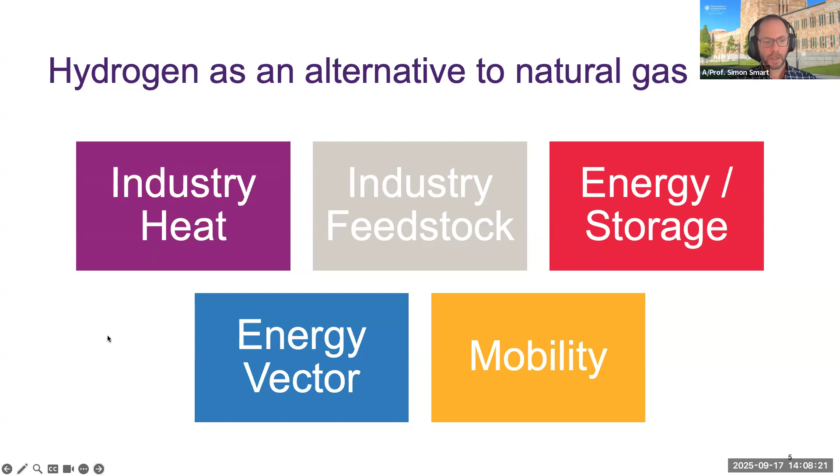In terms of the Australian hydrogen opportunity, this is one of the slides where I'm going to plug Net Zero Australia, our website. As Michael said, we've got an update to all of this next week. These are our phase 1 results. Essentially, when we look at the potential opportunity for hydrogen as an energy vector, as an export vector in Australia, we have tremendous opportunity.

In the study, we actually modeled both the domestic and the export system, and we said let's swap out all of our fossil energy exports for an equivalent energy amount of a hydrogen vector. So we're on the order of 140 to 150 million tons of hydrogen being exported by 2060, which is an extreme kind of scenario, but highlights what the world requires of Australia at the moment in terms of energy.

In terms of what that story looks like, in the majority of cases our modeling showed that initially blue hydrogen features, but as the cost of solar, electrolyzers and other renewable energy and storage comes down, green hydrogen largely wins that race.

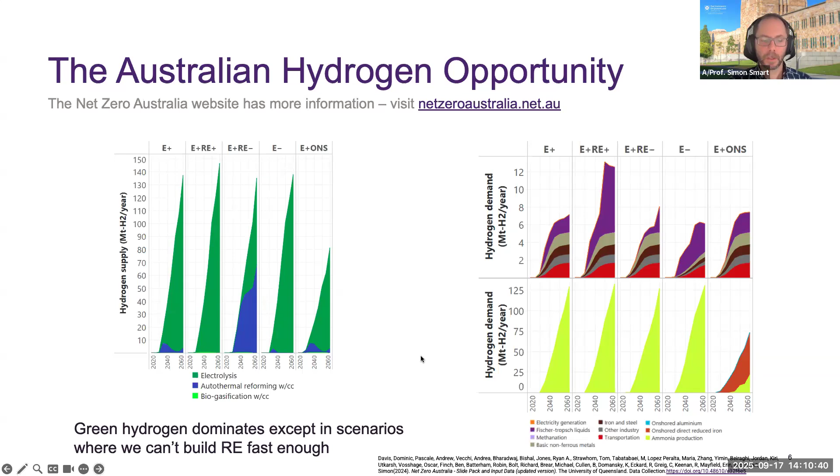That sort of paints an overview. I'd like to then move into what's essentially a discussion of how we make blue hydrogen. But I thought it's important to remind the audience, many of you will know, some of you may be less familiar, but given that hydrogen is, from a physical perspective, an odorless, colorless gas, the way we like to think about it, we assign hydrogen colors.

When 90-something percent of the world's hydrogen right now is made from fossil feedstocks, that gets sort of anywhere from black hydrogen for coal through to gray hydrogen for natural gas. We have white hydrogen, which is around naturally occurring underground reserves, gas reserves that have high hydrogen contents. And then blue, which is essentially characterized as fossil - so we're still using a fossil source, but we're adding carbon capture and storage to it.

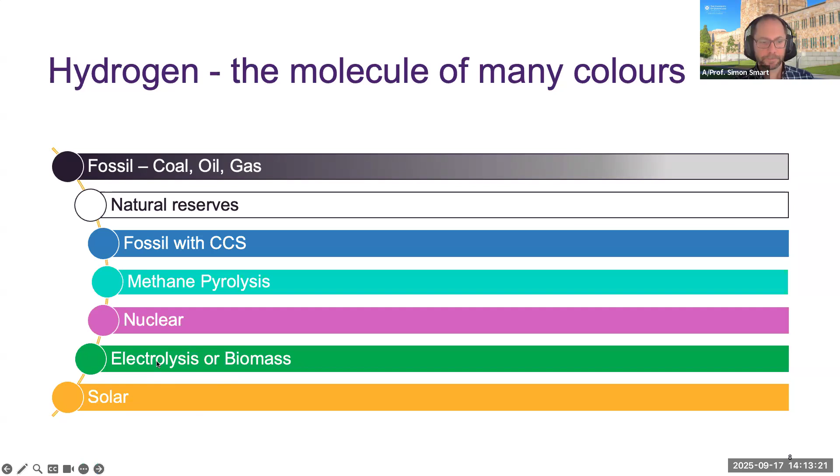But there is a little bit of an elephant in the room, which is: is blue better than gray? This all started with a 2021 study that started a very interesting debate.

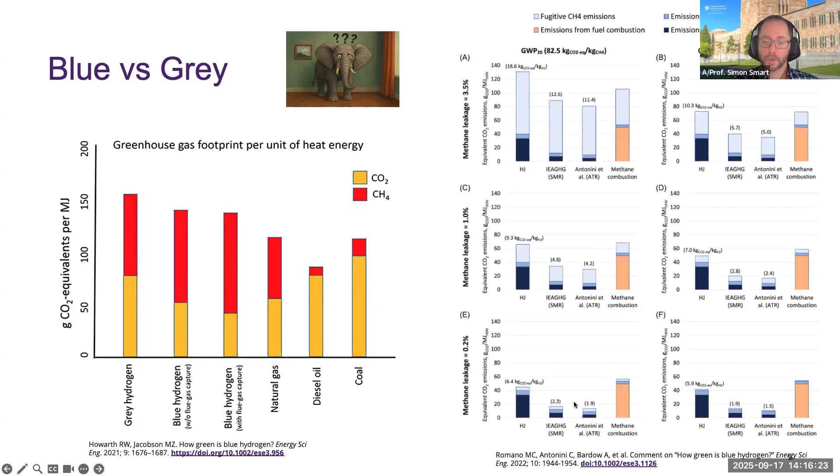But what this study looks at is essentially showing that using their assumptions and analysis, blue hydrogen was anywhere between 30 and 60% better, or a reduction on emissions intensity, compared to grey hydrogen. But as we haven't built many blue hydrogen plants around the world, this is still a contested space.

Okay, so what I'd like to go through for the next few minutes, or through to the end really, is the different production ways in which we can make blue hydrogen. I'll focus on coal and gas because they're the predominant feedstocks in a country like Australia. The majority of this work is a result of, or comes from, work that we did with the Future Fuels CRC.

So I'd like to, if I forget to do it at the end, acknowledge their funding support for this particular piece of research. So let's start with coal.

There are multiple different sort of reactor processes that we can use to turn coal into hydrogen, but they all use an overarching process called gasification.

Gasification is basically where we take a carbon feedstock like coal, and add heat and a little bit of an oxidizer, so something like steam, oxygen, or air. We do it at high temperatures, moderate pressures, and instead of completely burning into carbon dioxide and water, we end up making a product called syngas, which is a mixture of hydrogen, carbon monoxide, and carbon dioxide.

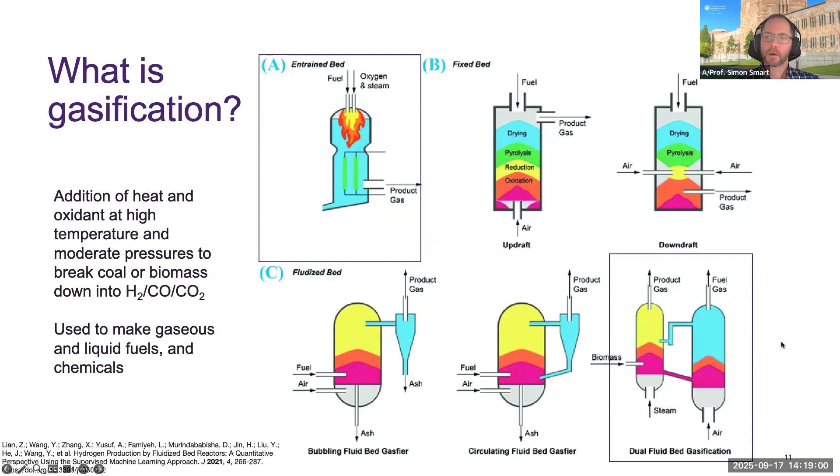What we've focused on is an entrained flow and a dual fluidized bed gasifier - some of the more common types out there. We ended up looking at using both Queensland black coal or Victorian brown coal as feedstock.

In the case of Queensland black coal, we need to make a slurry before we feed it into the gasifier. In the case of brown coal, it's already quite wet, so actually we have to dry it before we feed it in. We're feeding in pure oxygen alongside steam to do the gasification.

That produces our syngas. We then pass it through what's called a water gas shift reactor, which converts all the carbon monoxide into carbon dioxide, and in the process gives us more hydrogen. Then we remove the carbon dioxide, send it through a purification unit, and we get our hydrogen product.

In this process, there are two places where carbon dioxide is made: one is through the actual gasification process, and the other is through the addition of heat when we generate steam. So we modeled this by removing CO2 from both sources.

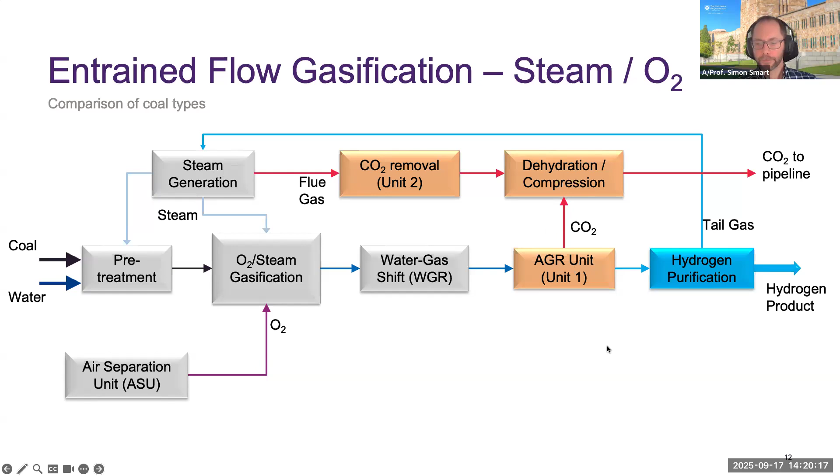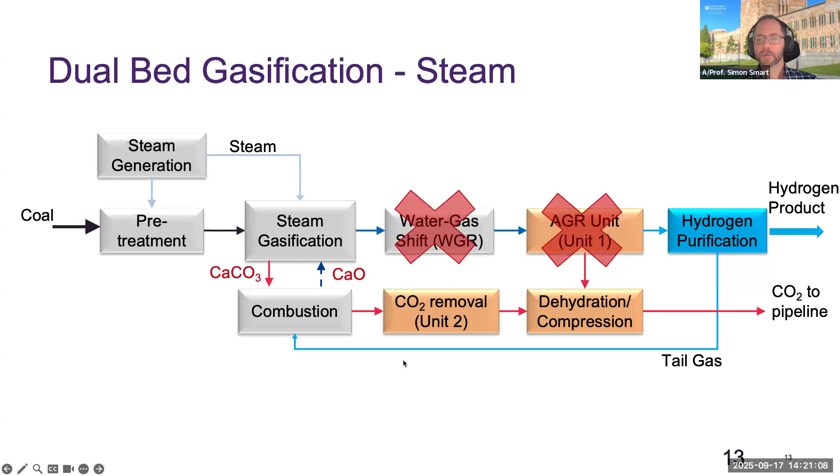The other process is this dual fluidized bed process. Here we focused on Victorian brown coal, again dried in the pre-treatment section, with a steam gasifier, essentially the same process. The difference on the downstream side is that we also looked at not only an external heating process, but also in situ capture - a chemical looping process where we add calcium oxide and retrieve calcium carbonate from the reactor as our way of removing the CO2. It's a different way of doing the CO2 capture.

We can have really quite low CO2 emission intensity. This is just a modeling study, and we've assumed a fairly high capture, greater than 95%. So we end up with quite low CO2 emission intensities, in some instances less than half a ton of CO2 per ton of hydrogen, which in an unabated process would be on the order of 15 to 20 tons of CO2 per ton of hydrogen.

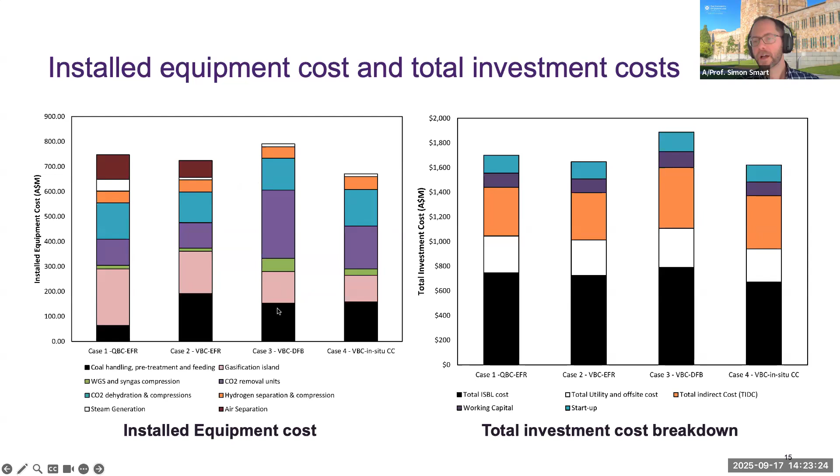If we then transfer that to a levelized cost, so dollars per kilo of hydrogen, we are looking at somewhere on the order between $4 and $5, based on our operating assumptions.

I note that last week EPRI, the Electric Power Research Institute, released a report about using Australia's coal to produce hydrogen for Japan. They had costs in their study, using slightly more updated numbers, of around $4.50 US a kilo, equivalent to about $6.70 a kilo. But the differences were that they had a higher coal cost - about 115 US per ton, as opposed to our $70 odd per ton US. Their plant was 7 times larger than ours.

Our basis was 100,000 tons a year, as opposed to 700,000 tons a year. And the big difference was that they actually took the CO2 and instead of storing it in a nearby reservoir, shipped it to Malaysia for storage. That added about 20 to 25% to the cost.

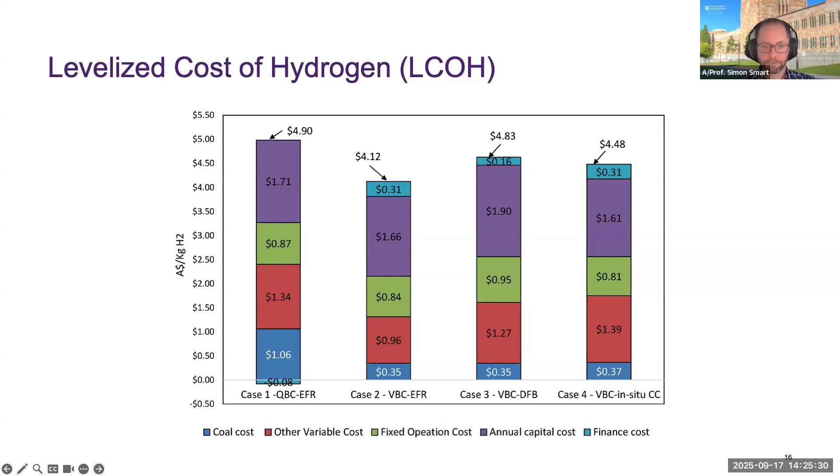If we do a bit of a sensitivity analysis to see how low we can go, the coal price and the capex have the largest impact on price. If we look for an everything-minimized price, we're looking at a levelized cost somewhere between the $2.70 and maybe the $3.30 mark, depending on the technology. In most cases, the Victorian brown coal comes out as the most prospective case - not quite the $2 per kilo, but certainly approaching it.

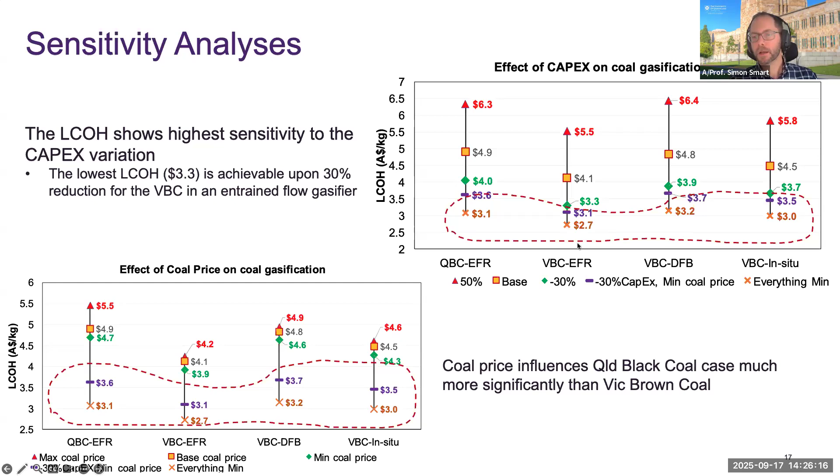I'd like to move on then, from coal to methane, to using natural gas effectively.

Again we've got a couple of different options here. We're doing the same thing where we're not quite completely combusting the methane, feeding in either just enough or not quite enough oxygen to burn it properly in the case of an autothermal reactor, or using steam as the oxidant to crack the methane. So the two technologies I'm going to talk about are steam methane reforming, SMR, very different to the SMR in nuclear small modular reactors, and the other one is ATR, autothermal reforming.

The difference is that in a steam methane reformer, we're typically supplying heat from outside and using steam to crack the methane. In the autothermal reactor, we're mixing everything together, feeding in oxygen, but not enough to burn it completely, and that's what makes our syngas - direct heating. These two technologies are amongst the most common ways the world produces hydrogen right now.

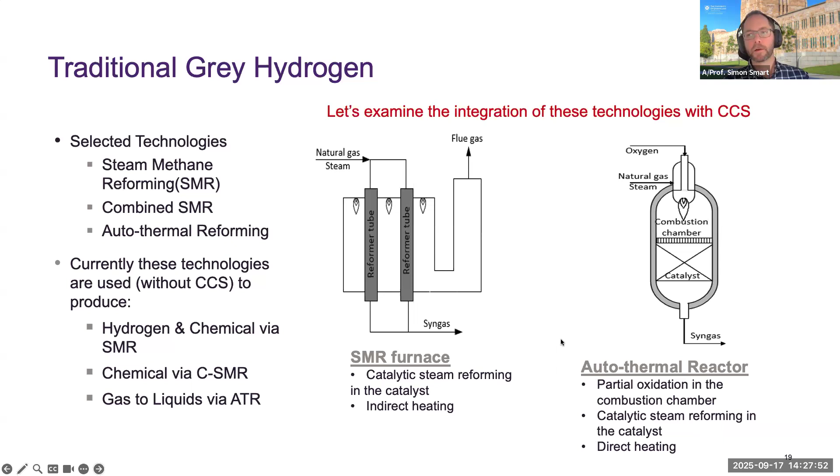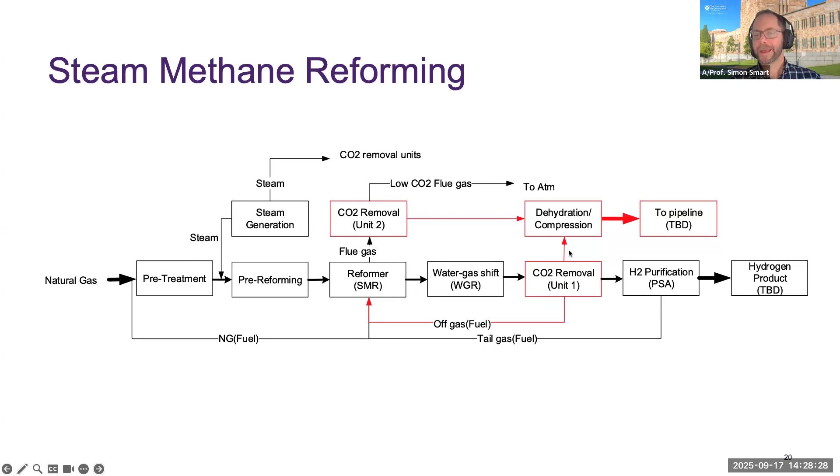What does that look like on a process flow sheet? Quite similar to the coal process flow sheet, particularly the back half around the water gas shift, the CO2 removal, and the hydrogen purification. Upstream of the reformer, which does all of the work, there's some pre-treatment as well. We've got two places where carbon dioxide is produced, both from the process and from the heating, and in our study we're capturing both of those.

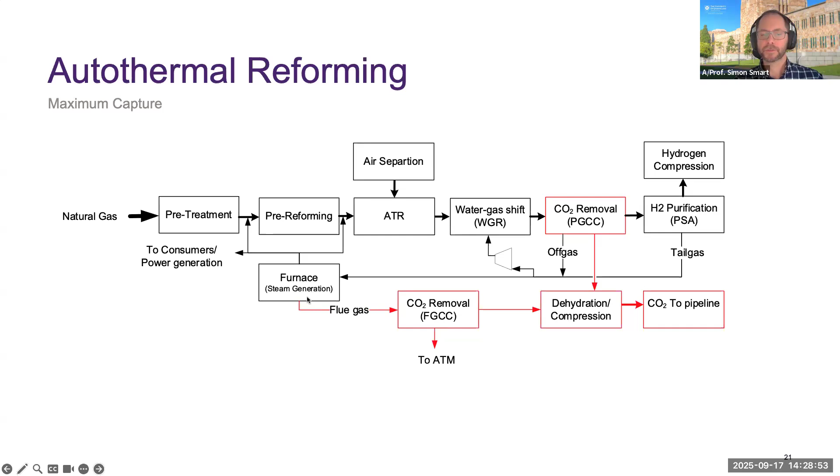For autothermal reforming, we looked at two cases. One where we're trying to maximize the amount of CO2 captured - you'll see it called maximum capture - removing it from the process as well as from the combustion gases used to provide additional steam into the process. Versus an option where we only remove the CO2 from the process emissions, and effectively emit the small percentage of flue gas emissions from steam generation to the atmosphere. This enhances our efficiency because we have less energy lost associated with CO2 removal, so we've called this our maximum efficiency case.

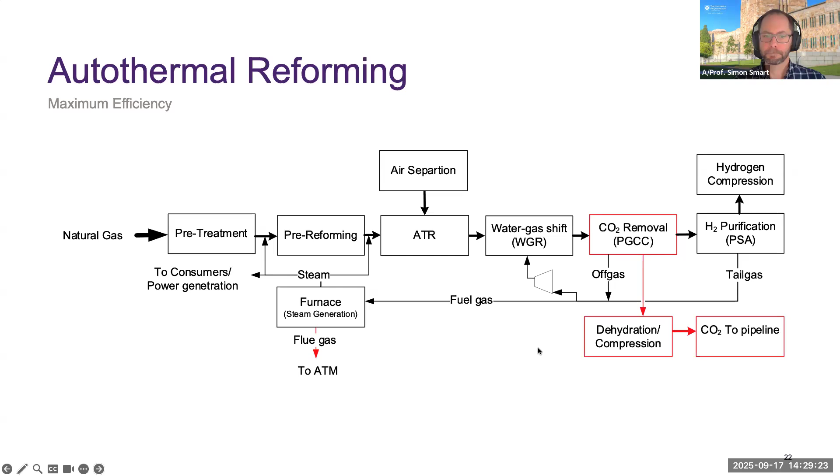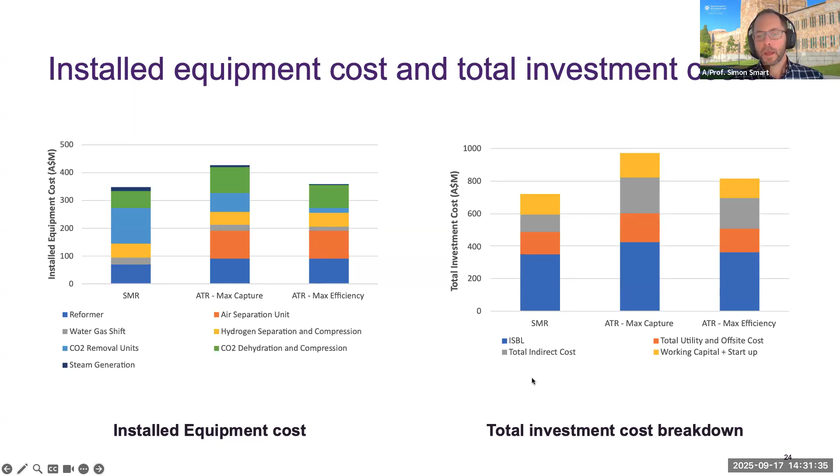If we then go to the levelized cost, these are slightly lower than what we saw for coal, sort of between $2.90 and $3.20 depending on the technology, with the ATR coming out slightly ahead. You can see here that natural gas has the highest contribution, so the price of the gas is super important.

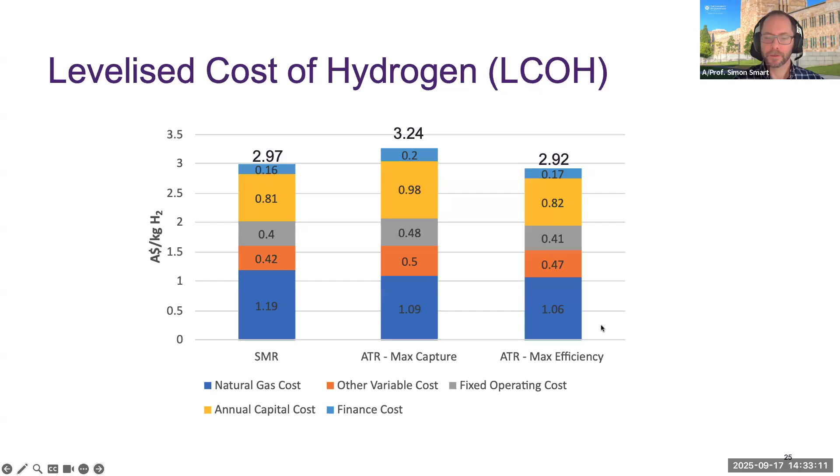Again, doing a bit of a sensitivity analysis. If we're looking at getting down to our $2 a kilo target, then we need both low natural gas prices and substantial capex reduction. So if a 30% reduction in capex and $2.50 a gigajoule price for natural gas takes us down under $2 for two of the technologies, that's $2.50 versus what we're seeing at the moment, $10 to $12 a gigajoule regularly, which is quite ambitious for reaching that $2 target.

We also, as my final point here, know that at larger scales ATR will become more capital efficient and more competitive as a technology than steam methane reforming is.

Okay, and in the last 5 to 10 minutes, to leave us some time for questions, I'd like to talk through methane pyrolysis, which is a bit of an emerging player in the blue hydrogen space. As I said, most people call it a turquoise color, not quite blue, not quite green.

What it is, is basically taking methane, CH4, adding heat, but doing it without any oxygen or steam around it. So we end up producing hydrogen and solid carbon. Effectively, if we can control leakage from our upstream methane supplies, it's a CO2-free way of making hydrogen, in that there's no carbon dioxide produced from the process, because the oxygen never comes in contact with the hydrocarbon.

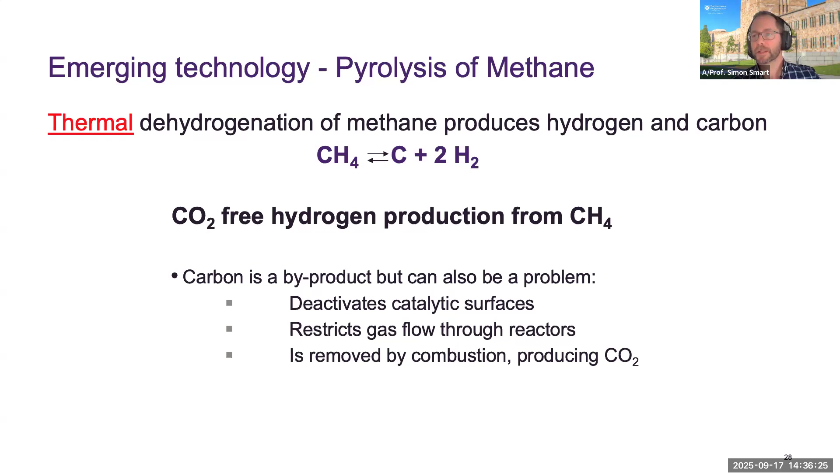So let's look at a couple of ways of doing this differently. I've got some slides coming up that look reasonably complex, but there are 2 basic technologies that I want to talk about. One of which is using a solid catalyst.

So something like an expendable catalyst almost, or like a reactant, but not quite a reactant. This is similar to an Australian company, Hazer, where they're feeding in a solid catalyst that can accumulate carbon, but they can remove it from the reactor and extract value from it in a sort of fluidized bed process.

The one which I'm more familiar with, and have done quite a bit of research on for the last 8 to 10 years, is using molten metals or molten salts, where we're effectively bubbling methane through a bath of molten salt or molten metal. The idea being that the density difference between the carbon and the molten media will enable it to float and therefore be removed. But also, as the bubble's rising up through the bed or through the molten liquid, we are effectively continually exposing fresh catalytic surface, so we never get deactivation. But of course, the flip side is we have to deal with liquids at sort of 800 to 1,000 degrees, and ideally in a pressurized situation.

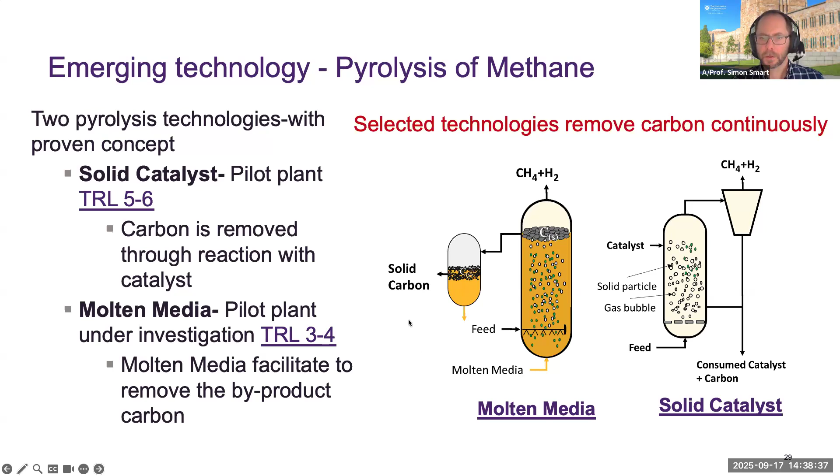So what do the flow sheets actually look like? In the case of the solid catalyst, we've effectively got our natural gas coming in, do a little bit of pre-pyrolysis to get rid of some of the higher hydrocarbons — the C2, C3, the ethanes, the propanes — crack them, and then send everything, the majority of methane, into the pyrolysis reactor.

The gas can be taken out the top — we might need a cyclone or something to clean out the solids — but effectively straight into purification. The tail gas can come off to add additional heat back into the reactor, which may also necessitate some sort of carbon capture from the burning of small amounts of carbon there. And then we also end up with our solid carbon separation at the end, where we might want to take it either for disposal or for use for sale as a byproduct.

In terms of the other options around molten media, it's a similar process where we're pre-pyrolyzing, sending it into the pyrolysis slurry bubble column reactor. Hydrogen can come off the top and be purified.

We do have to have a loop where we need to do carbon separation and heat molten salt, and that heating of the molten salt will typically either be through natural gas or through the hydrogen product or the tail gas product, which then also results in a small number of CO2 emissions, which can be captured and sent to storage. And then we've also got our carbon handling.

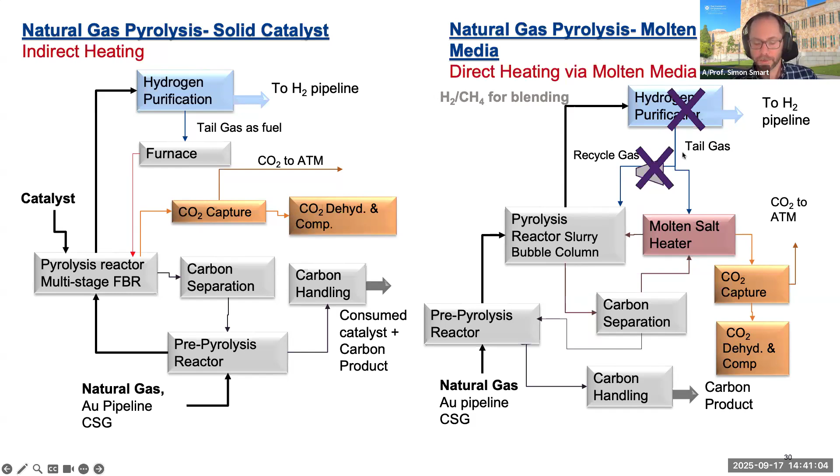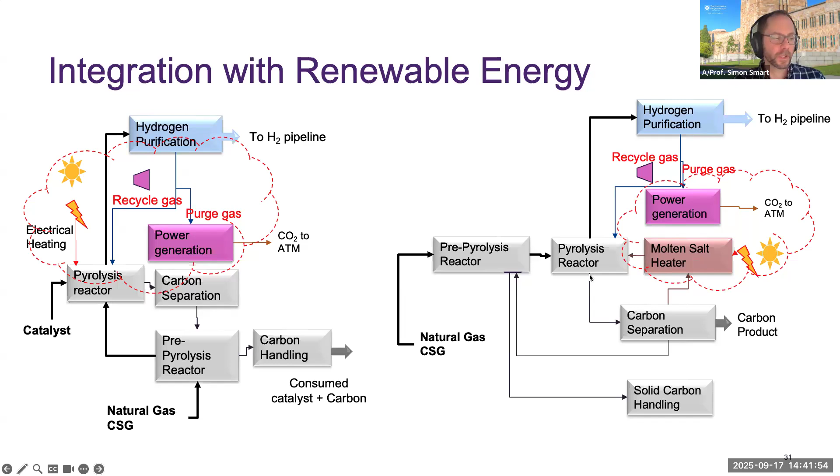We can also use renewable energy here. So in these instances, we're looking to remove that production of—we're looking to replace some of the heating requirement for the pyrolysis with electrical heating or solar thermal heating, and so to replace some of the combustion of the tail gas or natural gas in order to produce the heat for the reaction. And so that's this integration on both sides is what we've looked at as additional cases here to see how the impact of using less natural gas but changing it for electricity plays out.

In terms of our performance, I've got more cases here. In the interest of time, I can't go through them all. But what I will say is you can see that the emissions intensity, even for the one where we don't have CO2 capture, is quite low, sort of on the order of less than a ton of CO2 per ton of hydrogen.

So again, it's not quite green, but not quite blue. And we are producing anywhere between 1 and 3.5 to 3.6 tons of carbon, solid carbon, per ton of hydrogen. The efficiency of the process is a little lower because the pyrolysis reaction actually requires energy—it doesn't generate it because we're not fully burning the carbon.

From a cost perspective, levelized cost, we are looking on the order for most of these in the high $3s to low $4 a kilo, again with our low natural gas price of $6 a gigajoule. If we raise that to $11.90 a gigajoule, then these prices change from about $5.25 to about $5.90, depending on the technology choice. And we can see that the natural gas feedstock is a significant portion, as well as the capex.

The green bars here represent those renewable energy cases where we are swapping some natural gas use for an increase in electricity, or renewable electricity, with that renewable energy integration. This is a bit of a misnomer in terms of this is our blended product, so it's not pure hydrogen. So it has substantially lower capex as well as overall requirements because we're not making pure hydrogen.

From a sensitivity analysis perspective, the natural gas, the capex, and actually the byproduct cost are major drivers here. So if we're looking anywhere between a $0 disposal cost all the way through to some high value product at maybe $500 a ton, it swings the overall price quite substantially.

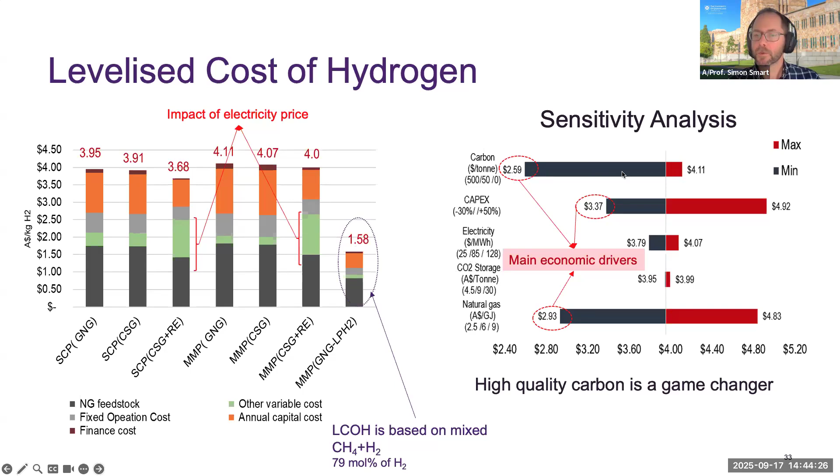And we see that play out in the sensitivity analysis where at a very high byproduct carbon price, if we can assume that we're going to end up with something really quite special in terms of the carbon product because of how we've controlled the chemistry, which is yet to be proven, I will add, then we're looking around that $2.30 to $2.80 a kilogram of hydrogen, which is not hitting our target, but is getting closer. Although there's a lot of uncertainty in these values because this is still low technology readiness technology.

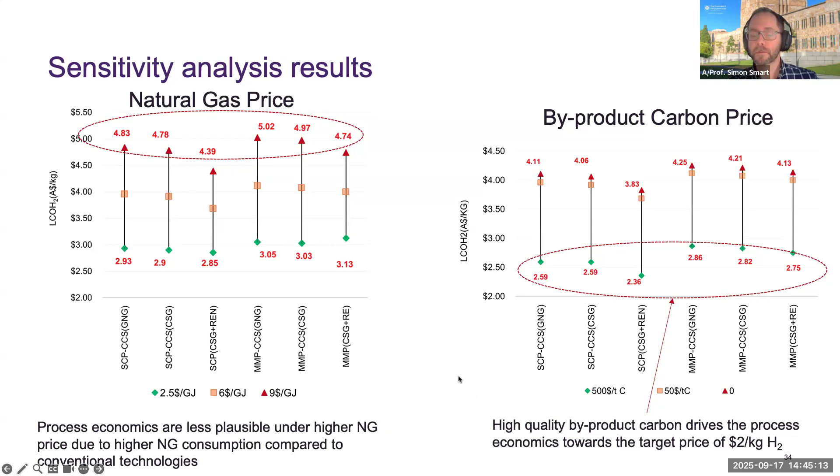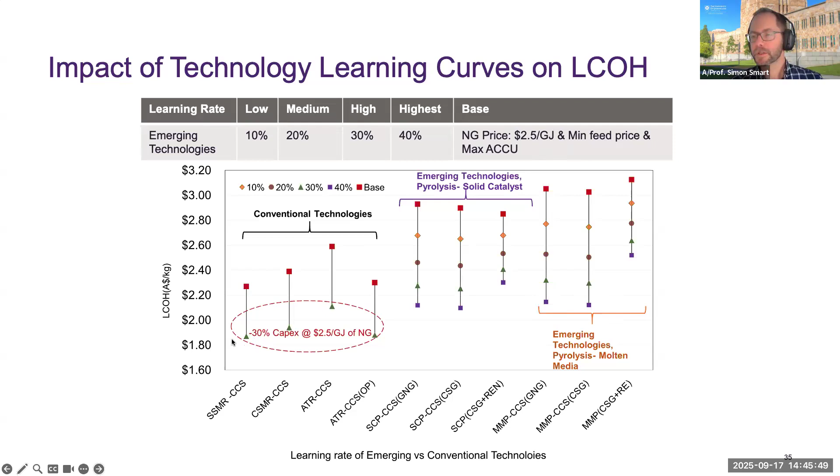And with that, I'd like to wrap up and be ready to take questions. I guess I'll finish by saying that blue hydrogen, I think in most people's minds, is a transitional process. And as it stands from a technology standpoint, natural gas is probably the most promising pathway, but it's highly dependent on the natural gas price. And so East Coast gas prices do not make that favorable.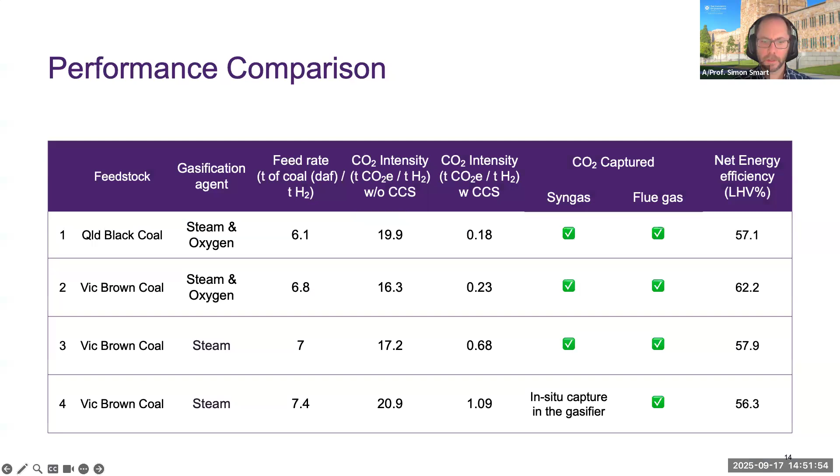Now, referring to slide 23, why does the maximum efficiency of ATR show a higher CO2 intensity compared with the maximum capture rate? Yeah, so if I can just really quickly go back to that slide—it's basically because we're not capturing. That's the ATR, wasn't it? This one.

So it's fundamentally because there is some CO2 produced in steam generation that's not part of the actual process. So there's CO2 made in two parts of the plant. In the max capture case, we capture both of those. In the max efficiency case, we only capture the majority of the emissions, which come from the process. The emissions associated with combusting natural gas for heat and steam provision in the process aren't captured—they're just released to the atmosphere. So that gives us a better efficiency, but it has a consequently higher CO2 intensity as well.

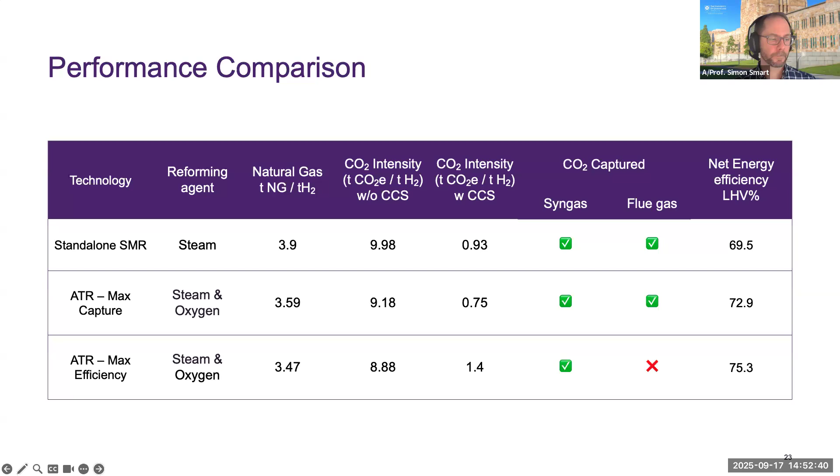Thank you. Now, we've had a few questions about how much CCS costs, so I think we've kind of answered those. The short answer is we don't know, and it'll be location specific. Extremely location specific.

So here's a question. We've had closure of government corporate projects on hydrogen, probably fair to say mainly green hydrogen, with economic and technical feasibility being stated reasons. Can blue hydrogen push the needle given this current situation? That's an excellent question. I think globally, yes. In Australia, again, it's very location specific. On the East Coast, I don't see gas prices coming down anytime soon, and maybe Michael or some of the folks online will have a dissenting opinion, but I don't see them coming down anytime soon, which makes blue hydrogen from natural gas uncompetitive.

Making it from coal has a slightly lower technology readiness level, and it's difficult to see proponents willing to take on the enormous capex requirements to build these gasifiers. On the West Coast, gas prices are much lower, so it may look prospective there, but we've still got to find a CO2 storage reservoir, and we haven't characterized enough of those. So I think it's quite uncertain in an Australian context.